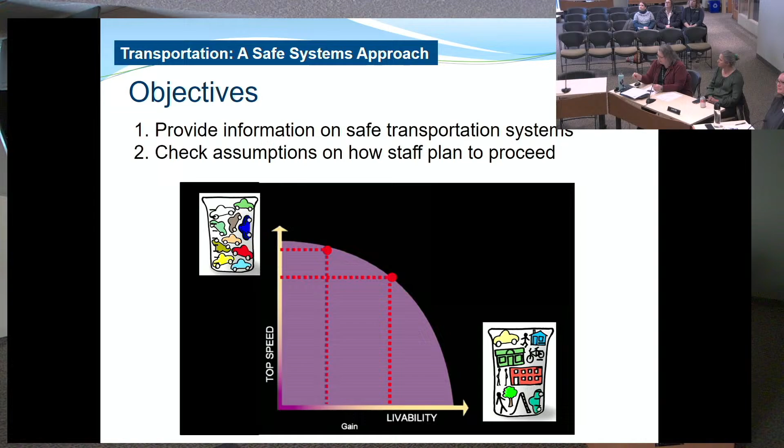On to assumptions. Similar again to your last workshop, we've pulled together these assumptions that, as we look forward into how we implement the Focus River Falls plans, we want to check against what all of your thoughts are for our transportation systems. Right now I'm simply going to read through these, and you can think about them as we go through the workshop. You'll also note they are on a handout in front of you, so you can reference them as well.

We will prioritize safe, predictable transportation for all modes over fast vehicle transportation. We will view transportation on a system-wide scale, not a neighborhood scale. Additionally, all system users must share responsibility in the system. We have adopted plans, and we will implement them. That implementation will require additional funding sources. It will most likely happen incrementally, and staff needs to work on how that financing plan is going to roll out.

In addition, from a council involvement perspective, we're looking at certain touch points, such as the requirements of the purchasing policy, other required approvals like sign changes, grants, etc., photo opportunities like we've had in the past, and there's most likely potential for a council liaison on a Safe Streets Task Force in the future.

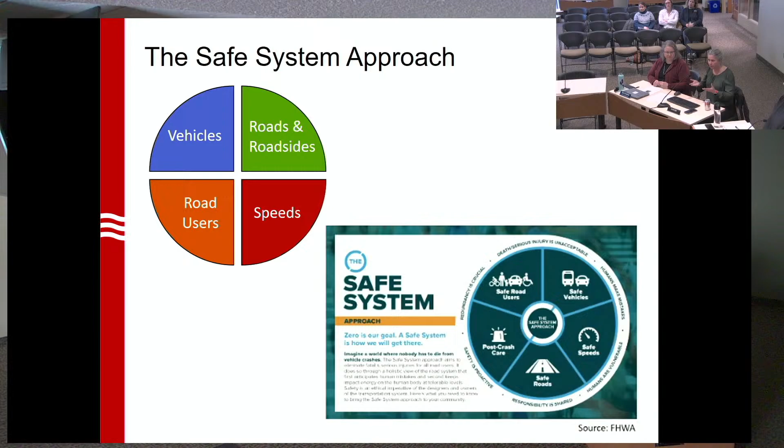And if I was on some rural roadways, maybe from a post-crash care standpoint, no one found me right away if I did get into a crash, so I take that piece of the pie out. It doesn't take long for our system to start to have a hole in that pie and grandmother to get really mad at us. The same thing applies to our system over our roadways itself. No one's usually out there trying to make a mistake, we're usually out there just a momentary inattention, and saying, okay, is our system robust enough to cover up that mistake? We'll talk a little bit more about that here.

So traditionally with the three E's or more, we started off with, every road safety problem can be solved by applying the three E's: engineering, education, and enforcement. Over the years, we've started to go into EMS: evaluation, example, encouragement, everyone. I think this is great. It was actually developed in 1915, and it was promoted by the auto industry.

I think personally that this works best for issues that involve a relatively small number of agencies and stakeholders, because it can be difficult to apply to problems that cut across professional disciplines or agency boundaries. We get a lot of, it's not my problem, it's their problem, right? So kind of pointing fingers.

I get this a lot with regards to impaired driving and run off the road crashes, especially in the southern part of the state. Engineering will say, okay, well, that's an enforcement issue. And enforcement says, well, that person ran off the road and hit a tree, so maybe it's an engineering issue. And so you kind of get into this, I don't know what to do with it, so we're just not going to do anything with it.

Another example would be a single vehicle run off the road crash involving fatigued drivers. These are fairly common out there. They're not isolated to a specific location. Roadway reconstruction is very expensive, so, okay, well, we'll just wait to see if more happen. From an enforcement standpoint, law enforcement might say, well, where do I go to look for fatigued drivers? How do I look for fatigued drivers and what's going on with it?

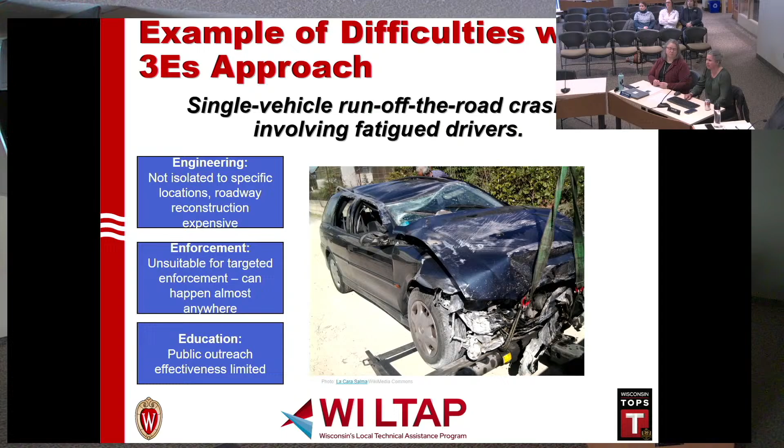In education, we're still trying to do drug and alcohol impairment. How do we get to fatigued driving? And so it can kind of get into these examples where you go, I don't know what to do, so we'll just wait and see.

I would argue that our safe system approach starts to give us some better information with that, right? So from a safe vehicle standpoint, we now have vehicles, right? If we think about that pie, we're going to start to bump up this piece of the pie where we have our lane assists. We have the ability to have adaptive cruise control and emergency braking. We also have vehicles now, so the newer Ford vehicles monitor your steering and monitor your acceleration. And if they start to see a lag, it'll beep at you and tell you that maybe you should stop.

My Subaru will actually, at 2 hours after the ignition's on, it stops and says—it doesn't stop, but it blinks and says, do you need a coffee break? And I have a caffeine addiction, so I'm like, I do. Thank you, car. Thanks for recognizing that. I do.

From our safe speeds, we're always trying to make sure that our roads are at the speeds that we need it to go to, and we'll talk a little bit more about that. From our roadsides, right, we have rumble strips. We try to improve our clear zones. We try to have better guardrails out there so that if you do leave the lane, you're not going to hit a fixed object at a high rate of speed. For our post-crash care, we're trying to make sure that our EMS are being able to get called to the scene quicker, and we're making sure that the trauma centers are there and better connecting some of that information together.

And from the safe road users, we're trying to do more to understand that fatigue driving is impaired driving. So a problem that we didn't know what to do with, you can see we are trying to address it in this kind of system approach. It's got a kind of it's not their problem, it's my problem, but all together working together on this.

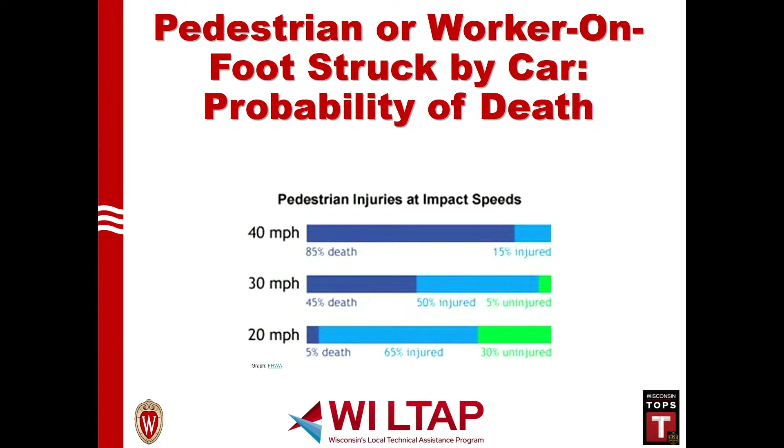But it's just making sure we think about it this way. Am I saying every roadway should be at 20 miles an hour? No. I know that's not going to happen for the safe and efficient movement of people and goods. But we do have to think about where we have people and vehicle interactions, and how do we get those speeds low enough so that when someone makes a mistake, not if, but when someone makes a mistake, they don't take somebody's life.

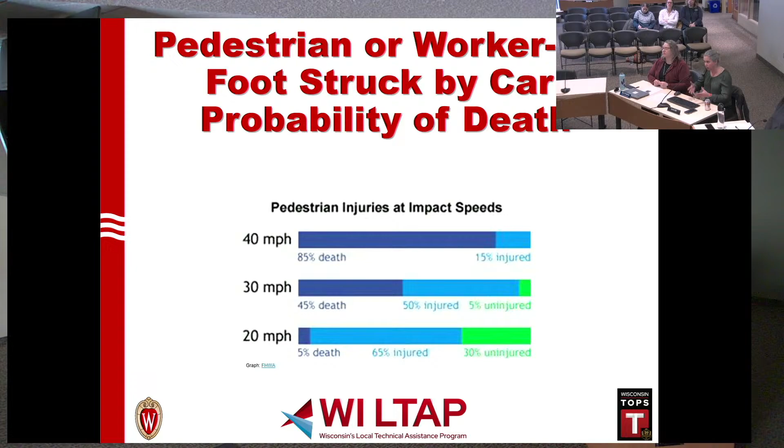Thinking about those in those terms really helps our idea of a system approach to our roadway network. It's not just that every roadway should be at 20 or every roadway should be at 40, but what are those interactions? Where do we have bikes and pedestrians coming together?

So I'm going to go back here quickly to these principles. Human bodies don't withstand crash forces well. We already talked about that. We also know that human bodies withstand crash forces differently. Our bodies can resolve more G-forces, absorb more G-forces front to back than side to side.

Same is true in football, right? The side hits are a lot harder on somebody than the front to back. And so even as we think about how we're designing our roadways, it's why roundabouts are safer than traditional intersections, because we're bringing vehicles slower and at an angle so that when a crash happens, it is less severe than those right angle crashes at high speeds.

So everything we're thinking about in designing our roadways is how do we minimize the speed, how do we minimize the energy transfer and keep it as soft as possible based on that. Instead of trying to eliminate all crashes, we want to focus on preventing death and serious injury from those crashes.

We know that some crashes involve an element of misbehavior, but many are just due to simple momentary inattention. I won't make you guys raise your hand, but I can say I've driven through a traffic signal before and wondered afterwards, was it red or green? My brain processed it, it was probably green, but there was a momentary inattention on my part that I didn't even process. So things like that happen all the time.

We want to strengthen all parts of our system: our roads, roadside, speeds, vehicles, users, and our post-crash care. And then as Amy already mentioned, system designers and system users must share a responsibility for managing crash forces to a level that doesn't result in death or serious injury.

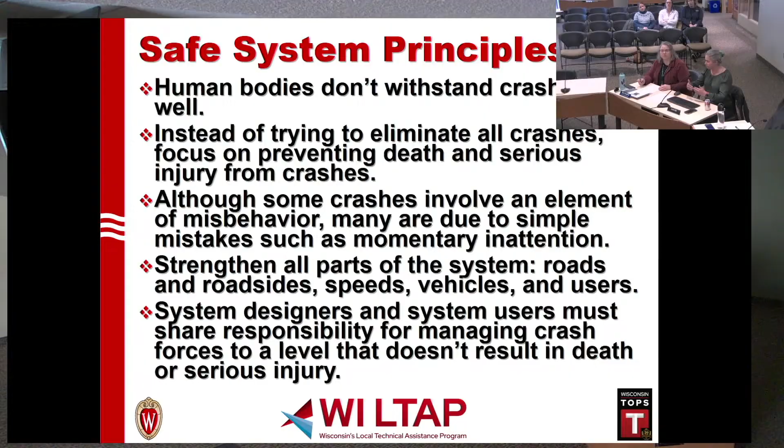There's a southern state that when you get your driver's license, you sign a memorandum of understanding. It is not a contract, it's not legally binding, but it goes through all of these things within an emphasis area that says: if I don't wear my seatbelt in the car, I become a missile, a projectile inside the vehicle. If I speed, I am causing this energy transfer. It goes step by step through what that system user's responsibility is.

So a lot of us get our driver's license, we're like, woohoo, we're free, we get to go do whatever we want, but understanding that it is all part of the system together. Okay, I'll go forward here.

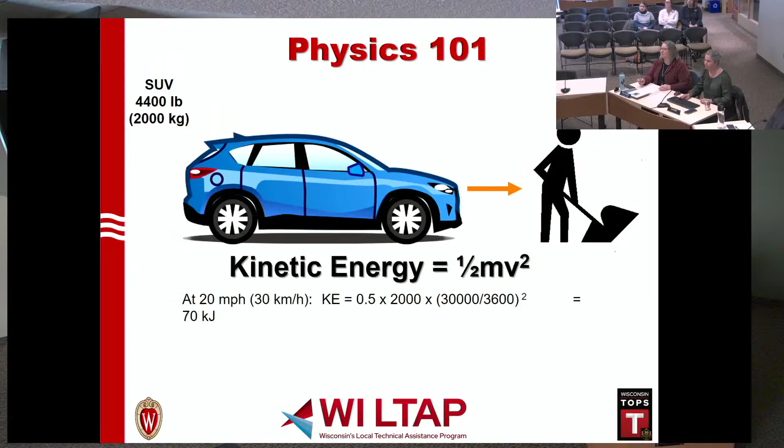Okay, I'm just going to check my time here because I'm going to go through perfect timing.

So the next slide, as we think about safety, I want you to think about it not just in terms of where crashes happened, but in terms of the risk associated. So I want you guys to think about it: if you've had children in your house, grown children, or nieces and nephews, how did you decide where to put those plugs into your electrical sockets? Did you wait for them to put their finger in one and then plug that one, and then wait for them to put their finger in the next one? Probably not, right? You said, okay, the kid is starting to crawl, it's probably going to start putting their fingers in things they're not supposed to. So we go ahead and in our homes, we think about this as being more proactive safety measures.

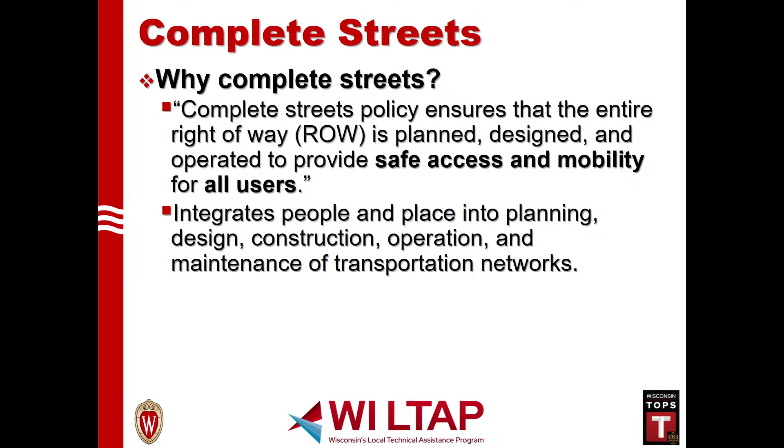All of this usually does improve motor vehicle travel as well, by making it a little bit smoother to get through and being able to integrate everybody together.

Agencies must consider the needs of current and future users when designing a new roadway, resurfacing, or reconstructing an existing roadway. So this takes a little bit of looking at that magic 8-ball - I'm dating myself - but looking at that magic 8-ball to say, okay, what are our modes going to be in the future? Do we have improved or different land uses coming?

What's the transportation network going to look like? What's our community growth patterns? And I know you guys have put a lot of energy into understanding and examining that. What is our stakeholder input? And then what are other policy goals that go along with it?

So with everything, right, there's always a problem. We have a limited amount of space within the right-of-way, and we have many competing demands that go along with it. We have large trucks that need a very large radius to get through our intersections. We have pedestrians that need to get across closer, and so when we have those large radii, we make the distance larger for our pedestrians to cross, and then we have blind spots. So there's always this kind of tug of war, trying to understand that.

There are design standards and guidelines that are common, but they usually come from one of two sources: either a research effort, or it's worked for decades so we're not really going to question it. There's really no scientific basis behind it. So it's really about saying, well, we know what's best for our community, we understand, and we want to try different things. We want to look at how we incorporate these different types of community aspects as we move forward.

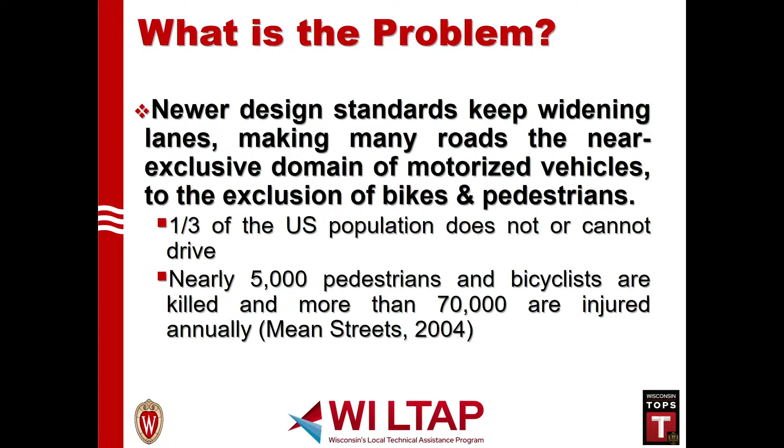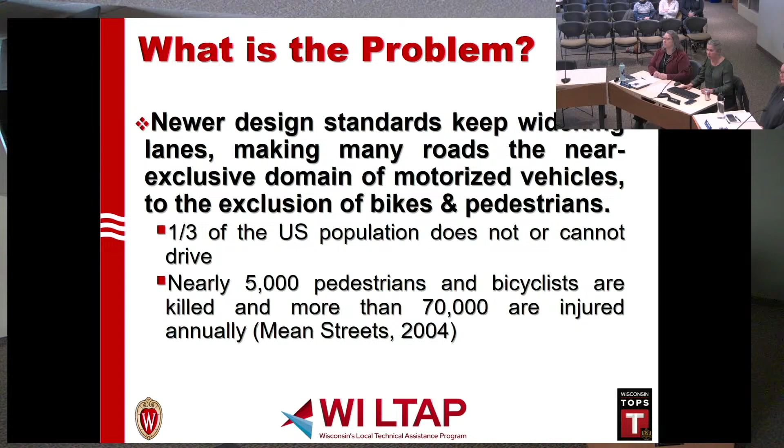If I start to feel like I'm a little more narrow on it, I start to feel a little bit more tight, I'm going to slow down. If we're thinking about managing that energy transfer, it's how do we make sure we're not causing harm to our population that does not or cannot drive. So we're thinking about how do we keep our roadways to the width we need for emergency vehicles and trucks to get through, but also understanding that the larger and straighter the road, the higher the speed is going to be. Those contradict, so we need to look at that and understand it.

We know everybody needs their separation or partially shared designated space. We have our sidewalks, our bike lanes, our parking lanes, and our travel lanes, and these competitions go back and forth. So we need to make sure we're adequately providing that information and understanding the type of walkers and bikers and other road users that are out there.

If we think about it, we have some bikers who are very comfortable biking on 55-mile-an-hour roadways and sharing the lane with motor vehicles. I am not one of those - I get very nervous, so I feel more comfortable in a bike lane. So again, it's that back and forth of saying what do our customers, what do our residents feel comfortable with, and what can we provide given the different scenarios out there.

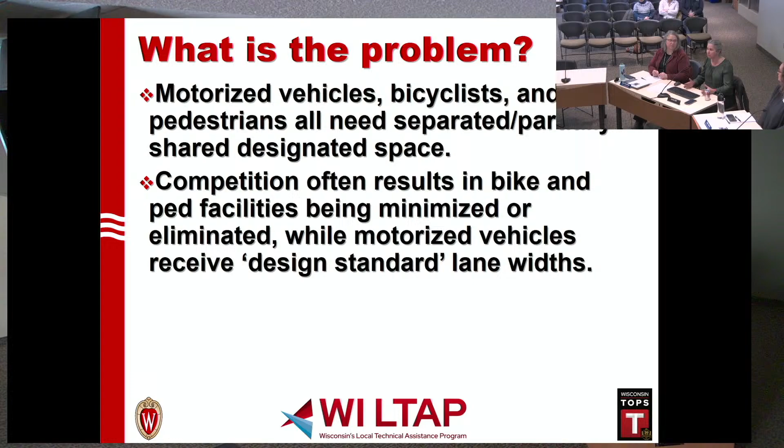This gets back into, just thinking back to when you're driving - I've had situations myself where a pedestrian, I'm coming out of the university and the A-pillar of my vehicle is blocking that pedestrian, and my heart skips a beat. Oh my gosh, what would happen if I didn't see that pedestrian? What happens if I was distracted or that pedestrian was distracted?

We want to make sure we're improving the safety for all modes, improving mobility and access for our population that cannot or does not drive. There is improved public and environmental health, and it increases our transportation capacity. So even as we think about narrowing our lanes sometimes and putting in roundabouts, those will improve the transportation capacity and get our motor vehicles through our system faster, and other works that are in there.

No one size fits all. So each community goes through this exercise and thinks about it in terms of what are the influences that work together with us, and there are ones that are competing, and we're looking at it.

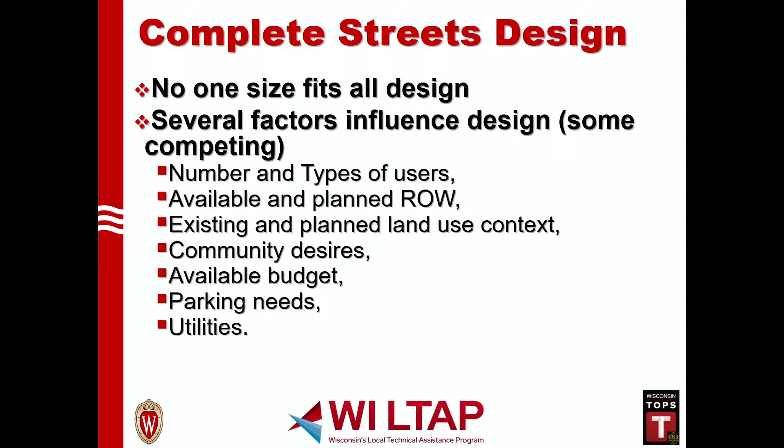At the end of the information today, I'll give an example. We won't go through it in terms of time, but it goes through how do we think about complete streets, and how does Chris look at it versus Amy versus me versus Todd? All of our opinions are probably going to be different, and it's working together to figure out what works best for that design.

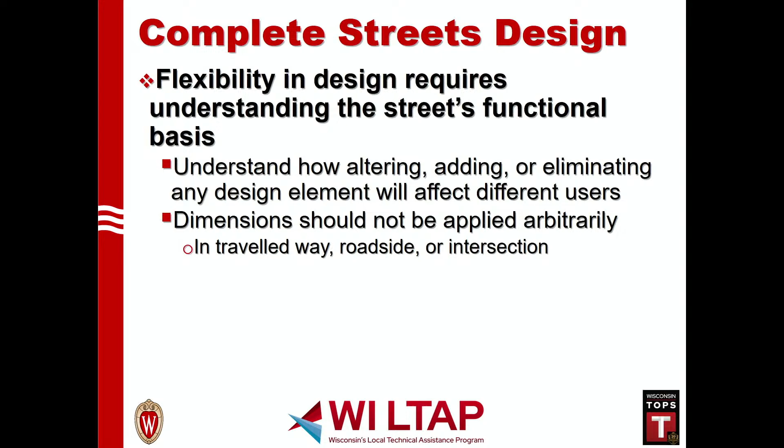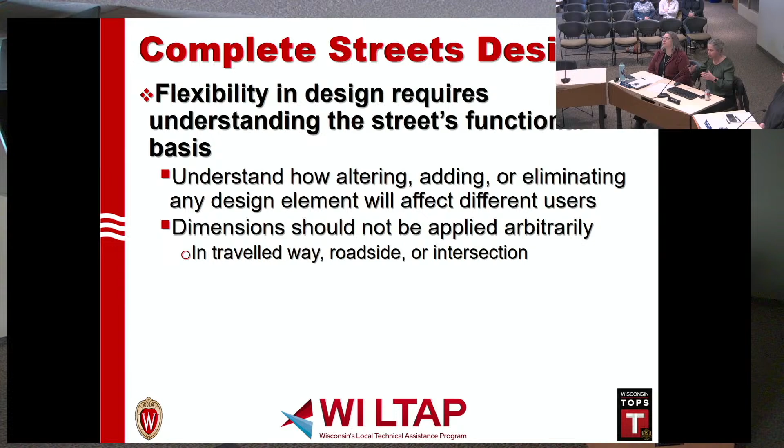We want to make sure we have the flexibility in that design, saying how are we going to develop or change. We used to build roundabouts large to get to that capacity in 20 years. We realized that as we built them that large, people traveled faster. So now we're making roundabouts that shrink in size - that central island is very large to begin with, and then as capacity grows, you can shrink that and make it into a multi-lane roundabout at a later point in time. So again, understanding that things can change - we don't have to build everything large to begin with, we can think about how we're going to change that over time.

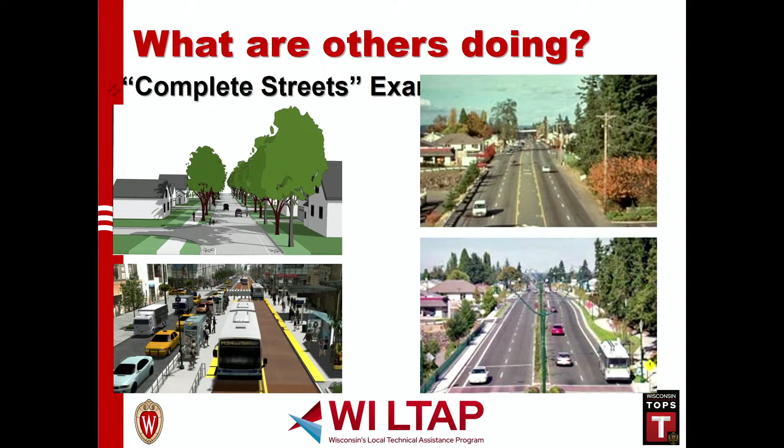And the flexibility - I want to get to examples. There we go, this is what we want to talk about. So what are others doing? If we think about complete streets examples, we think about residential areas and then urban areas, so you can see different examples here.

The top left that you see on your screen is looking at more of a residential area. You can see the trees buffering the sidewalks. So while there is a fixed object, if somebody does run off the road they might hit that tree. Hopefully the speeds are slow enough so they don't lose their life over that, but it's also buffering our sidewalks, giving younger pedestrians a chance to feel more comfortable walking right next to that roadway.

The upper right, while maybe not something we'd consider a complete street, is trying to narrow that roadway with a two-way left turn lane, the twiddle that goes along with it. The bottom left shows how we can incorporate bus lanes as well as traffic, and being able to look at it.

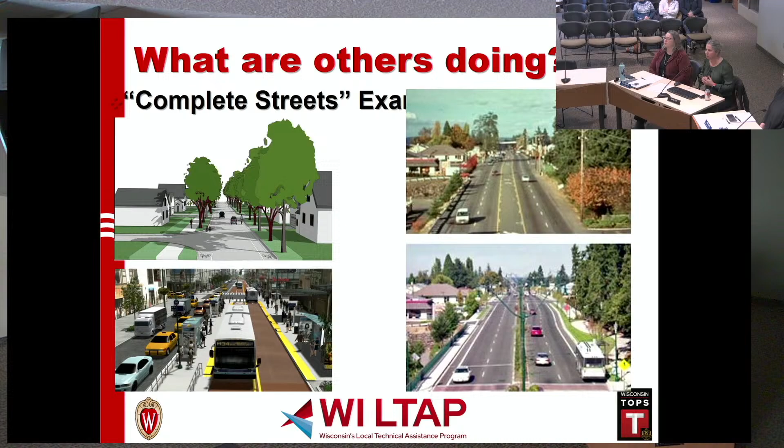So we think about this in terms of: 10 to 12-foot lanes can be used for rural and urban arterials. Narrow lanes maybe aren't just acceptable, but they may show some benefit too in lowering speed. So we can think about those as we go through some examples here.

A road diet—this is getting into how we think about changing our roadway configuration to maybe narrow the lanes and provide more room for a two-way left turn lane, a bike lane, or a transit lane. Maybe we have different roadway widths even. You can see in the top left the existing conditions, with a combined parking lane or moving lane depending on the situation, and then a moving lane. Now we can change it into a parking lane, a moving lane, and then maybe a two-way left turn lane in the middle, or a median that goes back and forth a little bit. Even just separating that traffic with that median is going to help slow things down as we move forward.

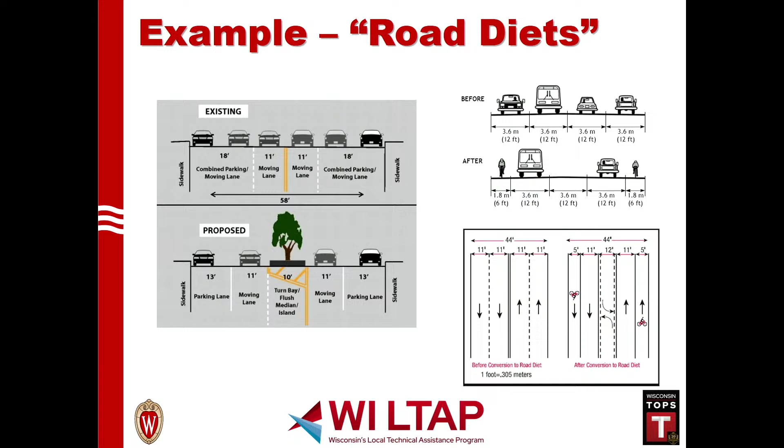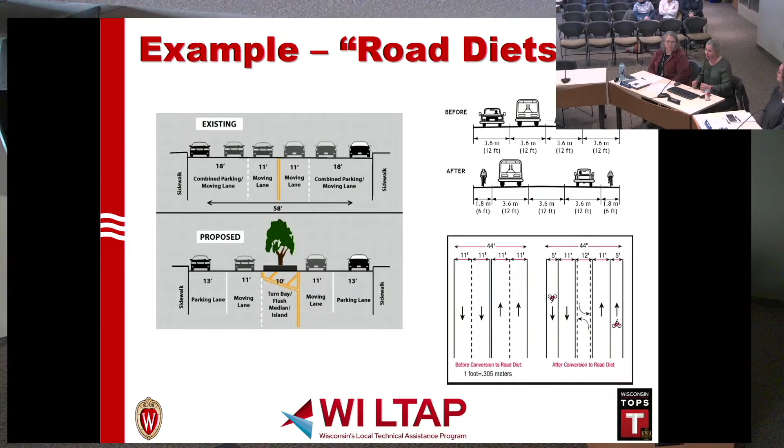And when I say slow down, don't worry—I'm not trying to slow everybody down on the roadways. It's just trying to say what roadways make sense to have a little bit slower speeds, or having people just travel at the speed limit we want. I have a whole presentation on speed limit setting, because people tend to travel 5 to 7 miles an hour over, even though speed limits are absolute and people should be traveling at that speed limit. People have a tendency to push that a little bit. So we want to make sure people are traveling at the speed limit we've set for that roadway, not necessarily slowing that speed limit down.

Roundabouts—already talked about the improvement in slowing vehicles down, being able to change the angle of travel, and again being able to make it more of a community aspect as well. A lot of communities will have different types of designs, or highlight different artists, to be able to look at it.

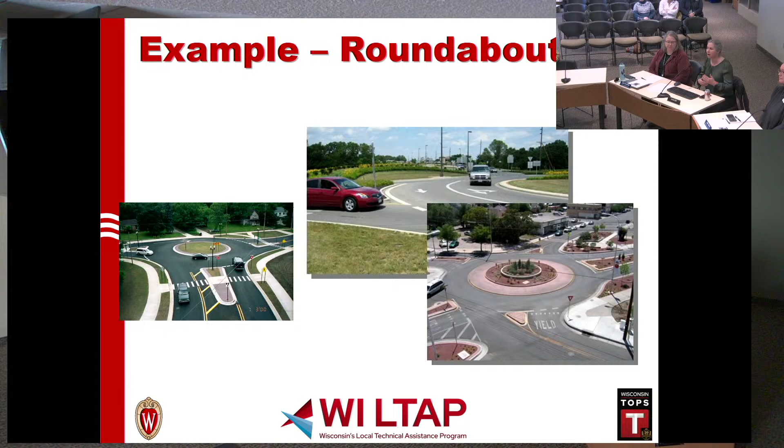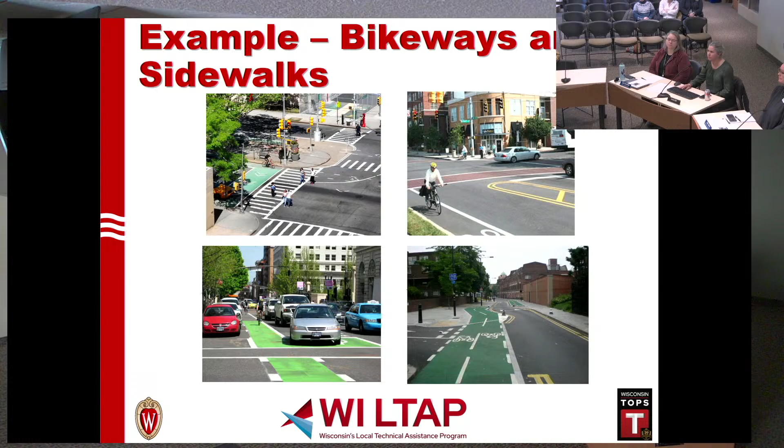Bikeways and sidewalks - this shows some different types of pavement marking to really designate that bikeway, to show where those bikes are going, to kind of separate it out so that we don't have vehicles encroaching onto those. We don't always have to fully separate bike lanes; we can do that through other types of markings or bollards, flexible tubular markers, to give bikes a place to go and keep vehicles out. There's also bike lanes and bike boxes where you get bikes up to that stop bar to help them turn and go through. So there are different options with regards to that.

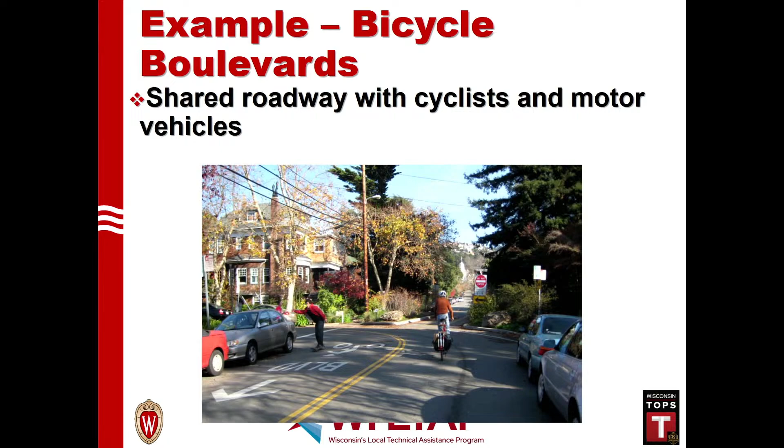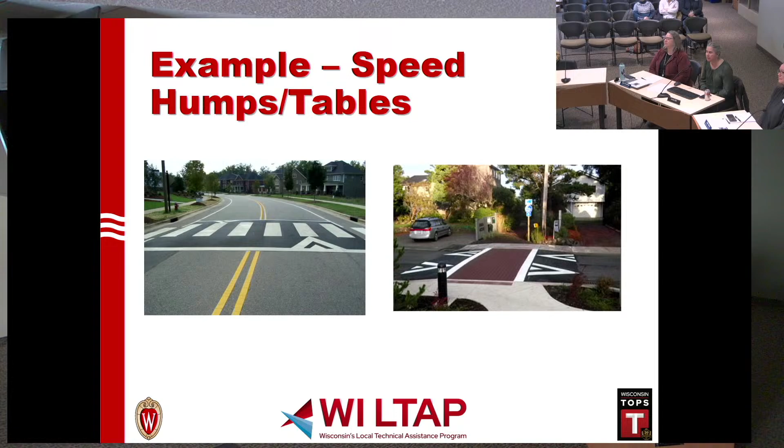Bike boulevards are kind of the shared component, so we look at those different options - maybe not everywhere, but based on certain roadway characteristics. Speed humps and speed tables, depending on your EMS and how this is set up, can sometimes be a bit cumbersome, so we want to put these more strategically based on where there are a lot of speeders.

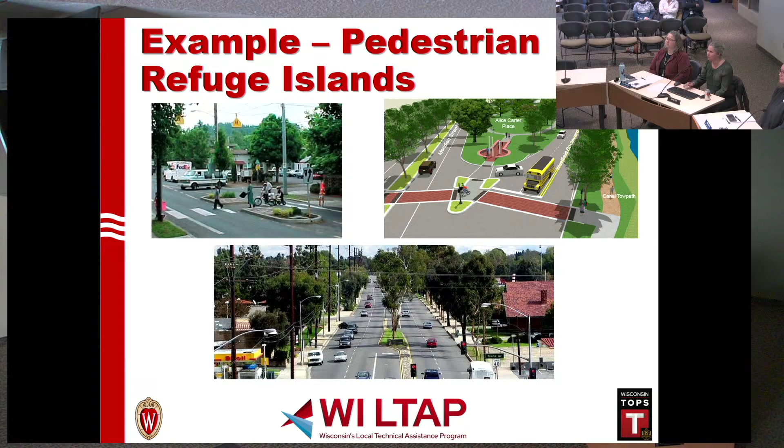Pedestrian refuge islands are a way to have this, if you have a very long crossing, be able to have someone stop and take a break in between that crossing, which is helpful. So those are kind of the initial steps.

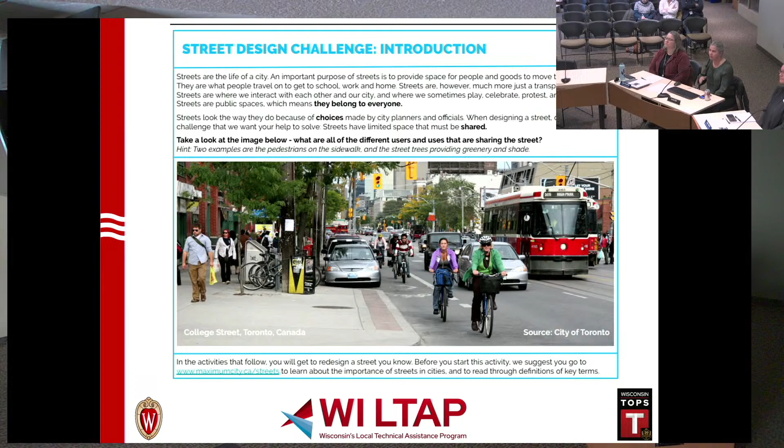I'm a little bit over, just a couple minutes, so I'll just introduce this. These slides are available for everybody. There are street design challenges that give people an example of how to look at different steps to examine your roadway, brainstorm ideas, and talk about a SWOT analysis - your strengths, weaknesses, opportunities, and threats.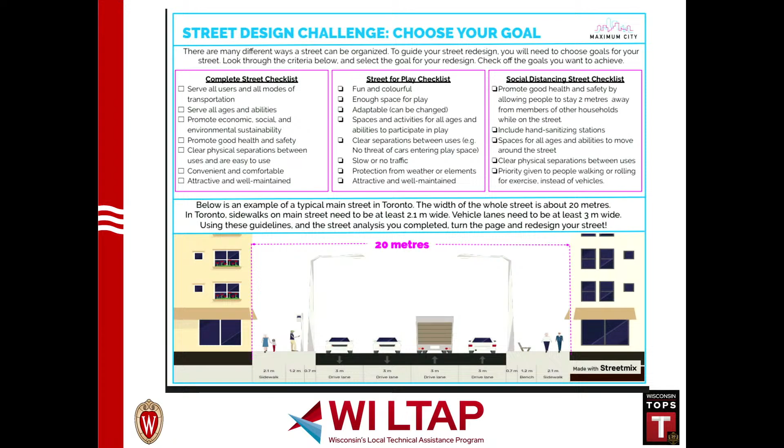And then designing it - you have this width, you've got your checklist to go through. You actually design it, then think about it and talk about it with others to say, okay, how do I look at this and design this? And then talk about what choices you made and why, and how it's meeting the needs of different people in your organization. So it's just a different opportunity to look at this.

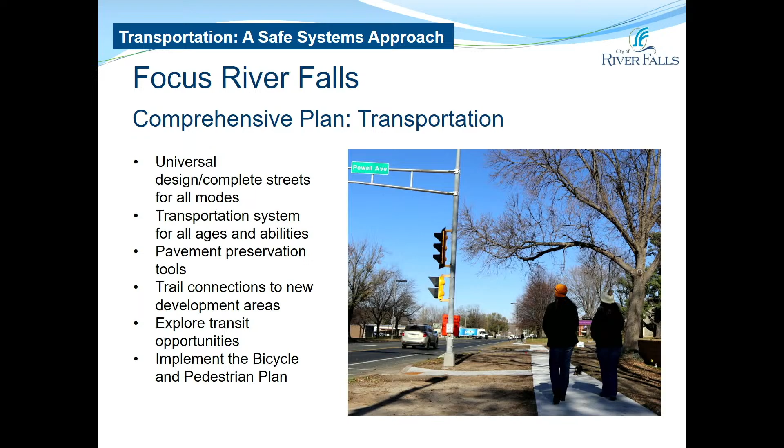In this image where we have the sidewalk infill on Powell and North Main, we've got truncated domes at that point where the sidewalk meets the street to provide safety. And then ensuring that new neighborhoods are well connected via sidewalks and trails - again, with this infill, we created a critical connection on North Main. The plan also addresses operations and maintenance, creates a system that works for all ages and abilities, continues the conversation about transit opportunities, and implements the recommendations of the Bike and Ped plan.

When asked what makes it difficult or what would make it easier to walk and bike, residents noted areas where sidewalks and trails are missing, breaking up connectivity, along with safety concerns. People identified several areas for improvement, including Main Street, Division, and Cascade.

When creating facilities for biking in particular, we focus on designing for the 90% of people who express those concerns. If we design sidewalks and trails for those folks, the people who are confident and fearless will also benefit. As Andi was talking about earlier, there's just a very small percentage of people who are strong and fearless.

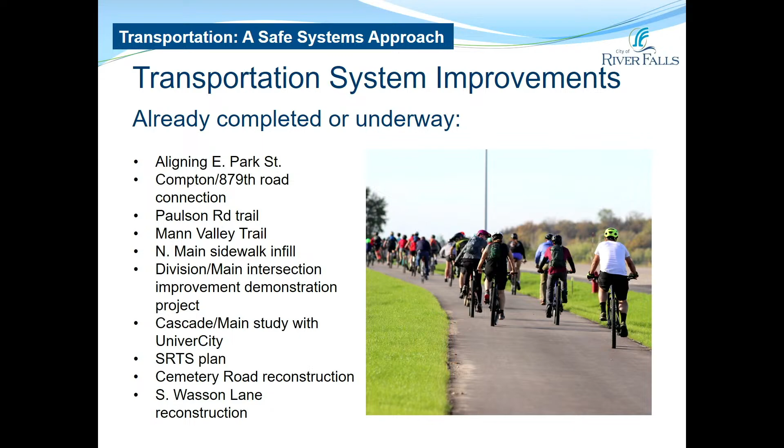When the Sycamore development occurred on South Main Street, we did a pretty major project to align East and West Park Street across South Main Street. With the Oak Hill development, we will be installing a multi-use pathway along 879th Street. With the North Interceptor project that was completed last fall, we installed the new multi-use trail on Paulson Road, which really was a pretty major connection from the Sterling Ponds neighborhood all the way down to North Main Street.

Emily mentioned that we did the North Main sidewalk infill that council funded via ARPA money in 2023. We did the AARP grant funded Division and Main intersection demonstration project last summer that highlighted some of the components that Andi just talked about. And as I mentioned, we are looking at improvements at the Cascade and Main intersection with Andi's team.

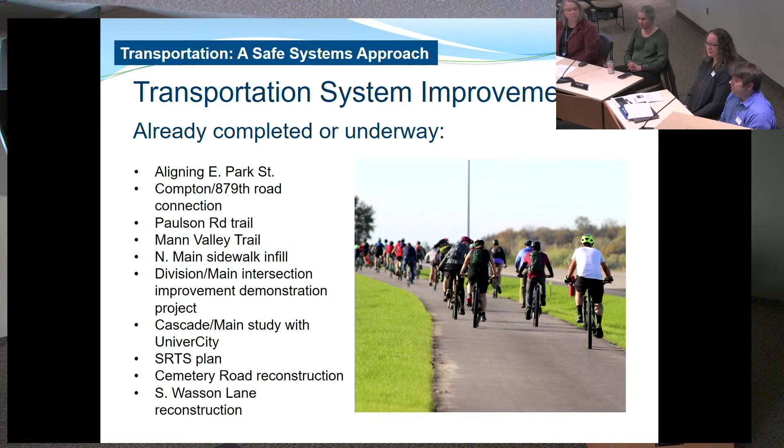The School District of River Falls recently completed a Safe Routes to School plan, which we participated in at an advisory level. DOT recently repaved Cemetery Road, and with that, there were some significant ADA improvements to all the crosswalks. And of course, we are working on South Wasson Lane reconstruction that we expect to occur this summer, which will include a roundabout at the intersection of Cascade and South Wasson Lane.

Moving forward, most of us are aware that the City of River Falls was awarded a DOT Safe Streets for All grant, and this was a direct result of the Vision Zero resolution that Council passed last fall. Talking about what we expect from this grant program, we expect to develop a Safe Streets Action Plan.

With that Safe Streets Action Plan, there will be a data-driven assessment of all roadways in River Falls, studying decades of crash data. There will be recommendations for projects and specific policies to help achieve Vision Zero. A big part of that project will be a significant community engagement component, which I think Amy mentioned will include a Safe Streets task force that we hope to have council participation on.

There is also the potential that our $200,000 grant may include implementation of a demonstration project. As far as a timeline for that project, we are looking to be about a 1-year study after we finalize a grant agreement with the federal government. So with that, I'll hand it back over to Amy.